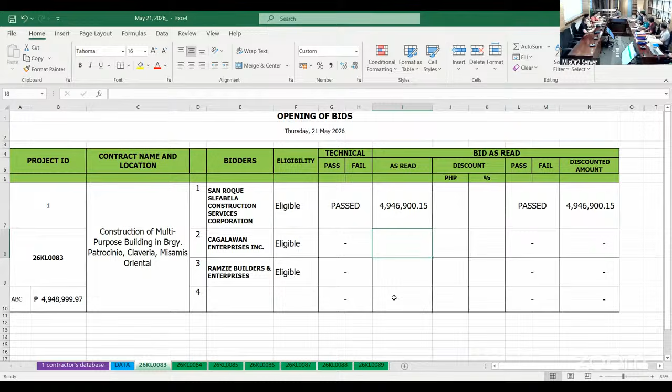Proposal for San Roque Slfabela Construction Services Corporation, composed of 33 pages. Bill of quantities present. Detailed estimates present. Cash flow by quarter and payment schedule present. Bid form. Signed. Bid amount: 4,946,900 pesos and 15 centavos only. I repeat, 4,946,900 pesos and 15 centavos only. I'm sorry, with a discount of 10,000 pesos from the amount.

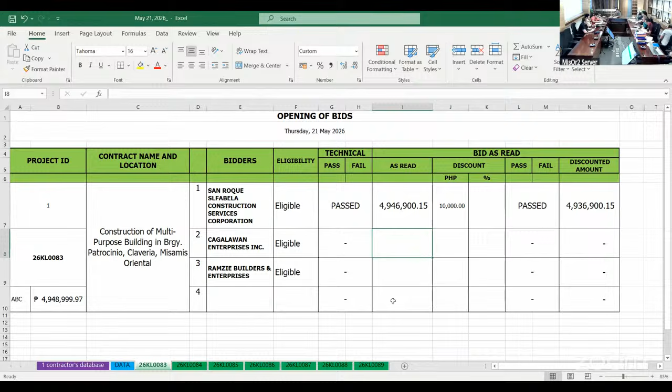Technical component of Cagalawan Enterprises Incorporated. Bid securing declaration signed and authorized. Contractor's organizational chart signed. List of contractor's key personnel to be assigned to the contract signed. List of equipment to be assigned to the contract signed. Construction safety and health program. Attached and signed. Omnibus sworn statement. Signed and authorized. Tax clearance attached.

Present the documents for Cagalawan Enterprises Incorporated, composed of 20 pages. Bill of quantities present. Detailed estimates present. Cash flow by quarter and payment schedule present. Bid form signed. Bid amount: 4,945,885 pesos and 65 centavos only.

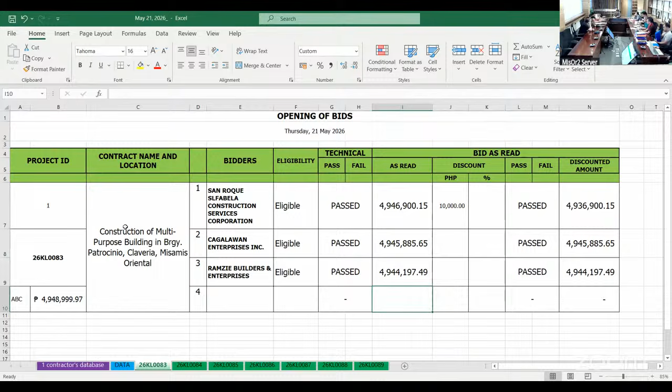Proceed to our second project to be bid today. 26KL0084. Construction of multi-purpose building, Barangay Cogon, El Salvador City, Misamis Oriental, with coordinates of 124.499 degrees, 8.542414 degrees, with an ABC of 4,949,185.87 pesos only. In this particular project, we have 4 bidders: JDE Construction, M&L Construction and Enterprises, NDP Construction Services, and Ramzie Builders and Enterprises.

In this, the result of our eligibility checking on our CWA, it was found out that these 4 bidders are eligible for this project. We may proceed for the opening of the financial and technical response.

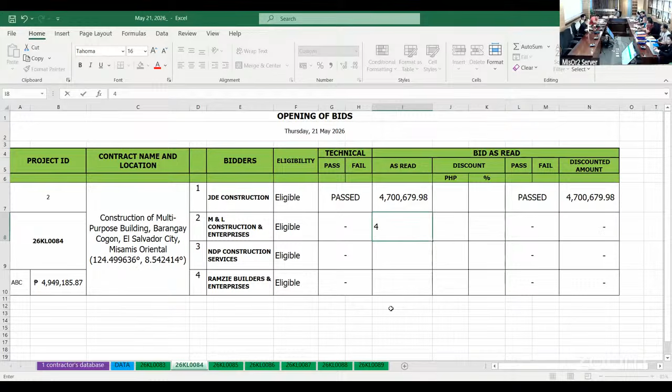Financial documents for M&L Construction and Enterprises, composed of 18 pages. Bill of quantities present. Detailed estimates present. Cash flow by quarter and payment schedule present. Bid form, signed. Bid amount: 4,945,402 pesos and 62 centavos only, with discount offered of 7% from bid amount.

Technical component of NDP Construction Services. Bid securing declaration, signed and authorized. Contractor's organizational chart, attached and signed. Contractor's list of key personnel for the contract, signed. List of contractor's equipment pledged to the contract, attached and signed. Construction safety and health program, signed. Omnibus sworn statement, signed and authorized. Tax clearance attached.

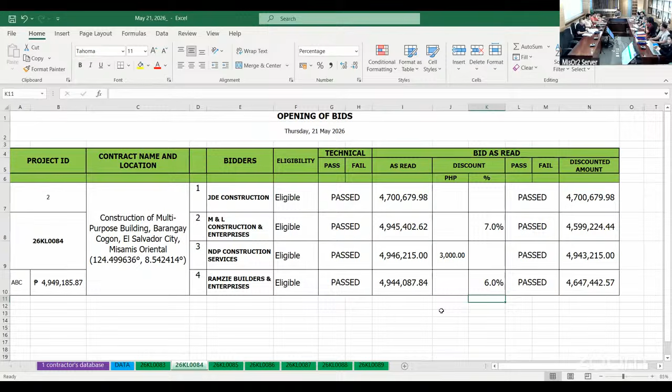Financial documents for Ramzie Builders and Enterprises, composed of 22 pages. Bill of quantities, present. Detailed estimates, present. Cash flow by quarter and payment schedule, present. Bid form, signed. Bid amount: 4,944,087 pesos and 84 centavos with a discount offered of 6% from bid amount. I repeat, bid amount is 4,944,087 pesos and 84 centavos with a discount of 6% from bid amount.

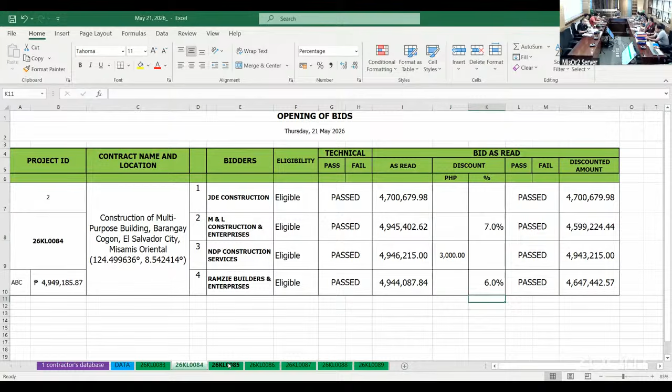We will proceed to our third project, 26 KL 0085, construction of multipurpose building, covered court, within Malibato Integrated School, School ID 127804, Barangay Malubog, Manticao, Misamis Oriental, with an ABC of 4,949,221 pesos and 34 centavos. In this particular project, we have three bidders: Hera 1 Strength Construction, Jamray Builders and Enterprises, and Abaycer Construction Supplies and General Merchandise.

Based on our generated CWA result, it was found out that these three bidders are eligible for this project. We may proceed to the opening of the technical and financial components.

Technical component of Hera 1 Strength Construction. Bid securing declaration, signed and authorized. Contractor's organizational chart, signed. List of contractor's key personnel to be assigned to the contract, signed. List of equipment pledged to the contract, signed. Contractor's construction safety and health program, attached and signed. Omnibus sworn statement, signed and authorized. Tax clearance attached.

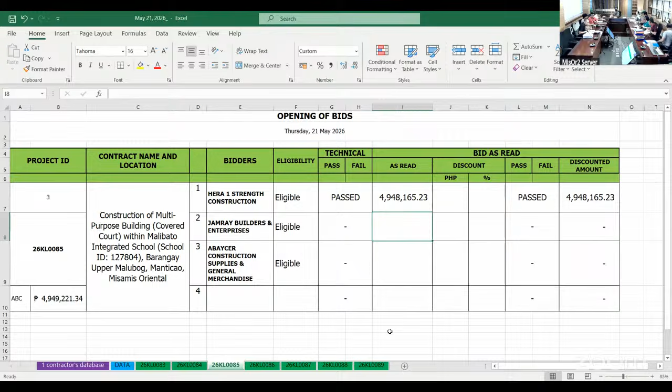Financial documents for Jamray Builders and Enterprises, composed of 19 pages. Bill of quantities, present. Detailed estimates, present. Cash flow by quarter and payment schedule, present. Bid form signed. Bid amount: 4,943,652 pesos and 96 centavos.

Technical component of Abaycer Construction Supplies and General Merchandise. Bid securing declaration signed and authorized. Contractor's organizational chart signed. List of contractor's key personnel signed. List of equipment pledged to the contract, attached and signed. Omnibus sworn statement, signed and authorized. Tax clearance attached.

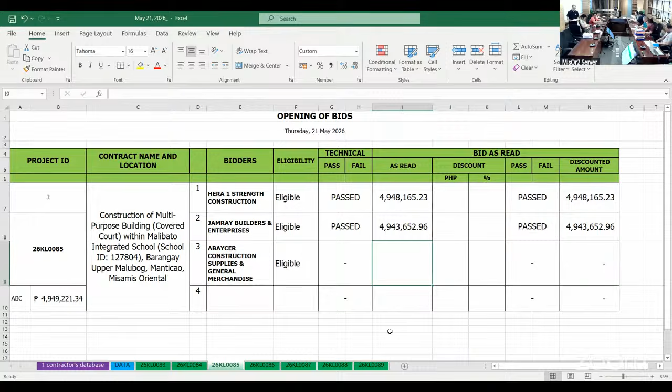Proposal for Abaycer Construction Supplies and general merchandise. The proposal consists of 11 pages. Bill of quantities, present. Detailed estimates, present. Cash flow by quarter and payment schedule, present. Bid form signed. Bid amount: 4,940,953 pesos and 54 centavos.

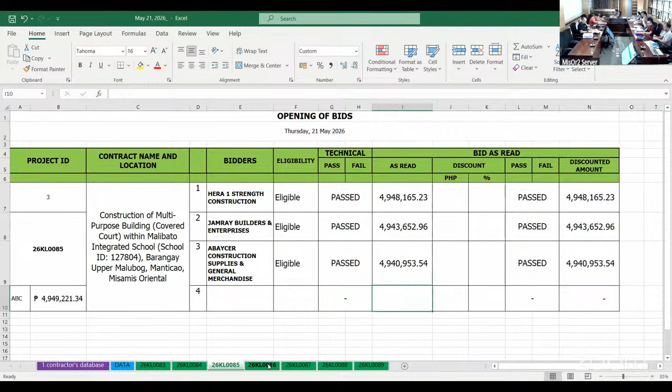So our fourth project: 26 KL 0086, construction of multi-purpose building, Barangay Calacapan, Initao, Misamis Oriental, with a coordinate of 124.364456 degrees and 8.491258 degrees, with an ABC of 4,949,328 pesos and 10 centavos. For this particular project, we have four bidders: NJS Construction and Services, RS Construction, Hera 1 Strength Construction, and Ramdaan Construction.

Based on our generated CWA result, it was found out that Ramdaan Construction has no work experience for this project, so Ramdaan is ineligible. And NJS Construction and Services did not update their NFCC in our civil works application. We will check in their technical component if they attached their NFCC. RS Construction and Hera 1 Strength Construction are both eligible for this project. We may proceed to the opening of the technical and financial proposals for NJS Construction, RS Construction, and Hera 1 Strength Construction.

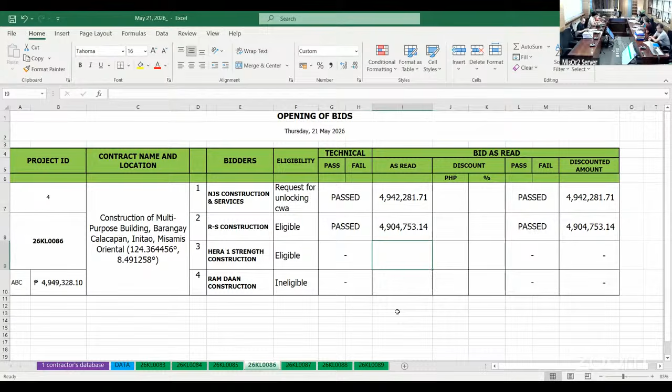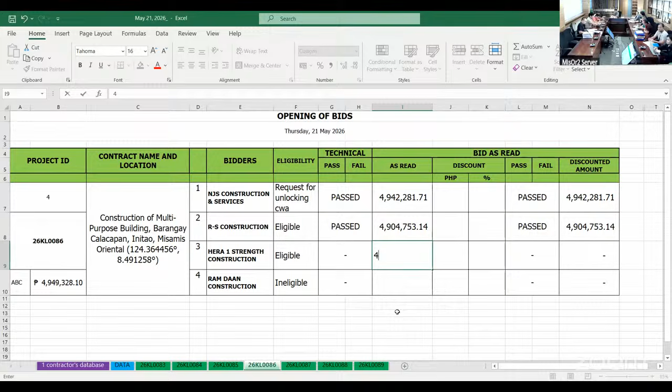Financial proposal for Hera 1 Strength Construction, composed of 65 pages. Bill of quantities, present. Detailed estimates, present. Cash flow by quarter and payment schedule, present. Bid form, signed. Bid amount: 4,944,287 pesos and 61 centavos, with a discount offered of 9% from the bid amount.

We proceed to our next project to be bid today, 26 KL 0087, construction of multi-purpose building, covered court at Madaguing Elementary School, School ID 127650, Barangay Madaguing, Claveria, Misamis Oriental, with an ABC of 4,949,398 pesos and 15 centavos only. For this particular project, we have three bidders: NJS Construction and Services, Naharo Builders Incorporated, and L&L Construction.

Based on our generated results from DPWH, it was found out that Naharo Builders Incorporated did not update their PCAB registration, NFCC, mayor's permit, tax clearance, and business registration on our CWA. Also NJS Construction and Services did not update their NFCC in our CWA. And L&L Construction is eligible for this project. For NJS Construction and Naharo Builders, we will check their eligibility documents for their updated documents. And we may proceed to the opening and reading of the technical and financial proposals.

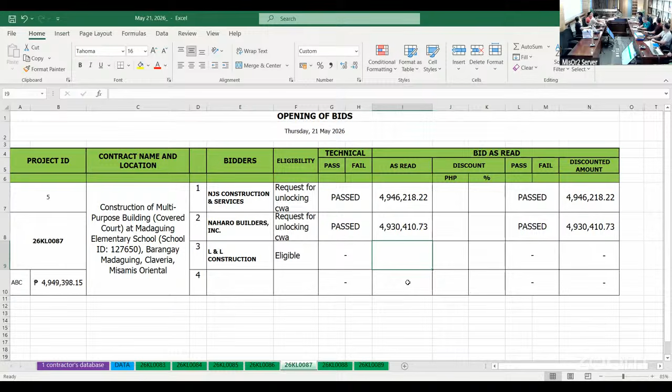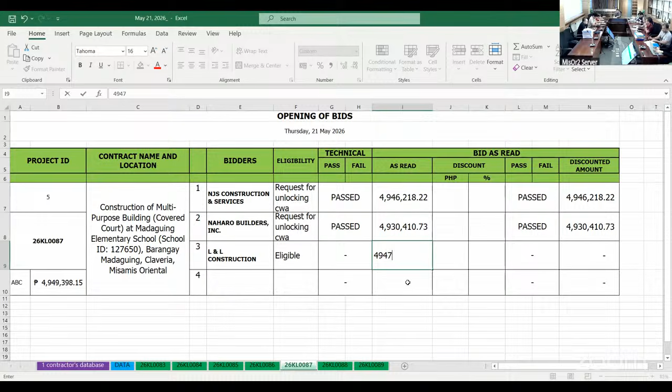Tax clearance attached. Financial component for L&L Construction composes of 13 pages. Bill of quantities, present. Detailed estimates, present. Cash flow by quarter and payment schedule, present. Bid form signed. Bid amount: 4,947,863 pesos and 16 centavos only.

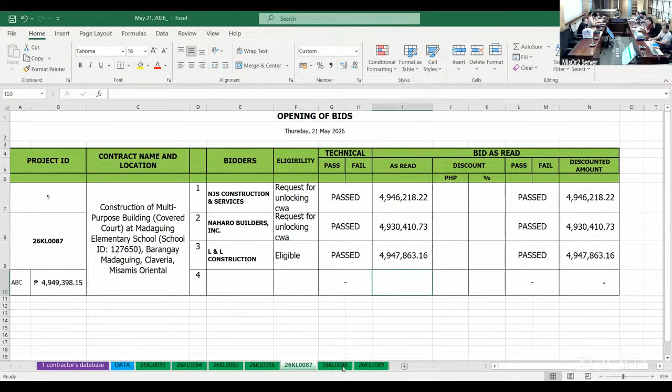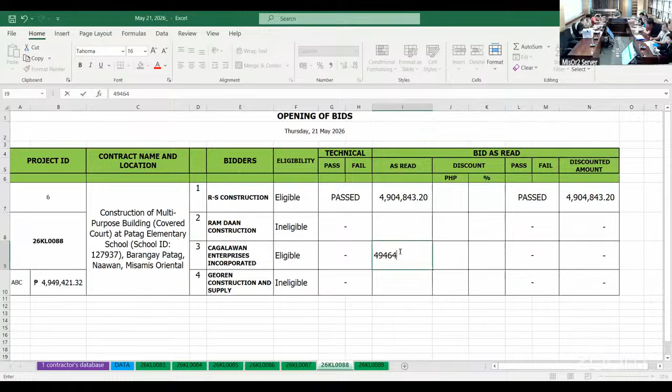Safety and health program attached. Financial component of Cagalawan Enterprises Incorporated composed of 15 pages. Bill of quantities, present. Detailed estimates, present. Cash flow by quarter and payment schedule, present. Bid form, signed. Bid amount: 4,946,421 pesos and 32 centavos, with a discount offered of 8% from the bid amount.

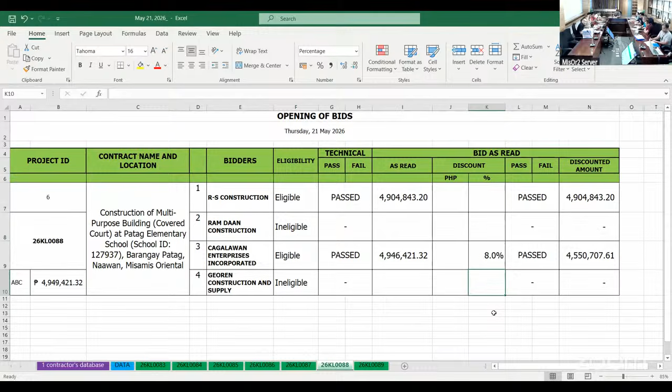We proceed to our last project: 26KL0089, construction of multi-purpose building, Barangay Mauswagon, Laguindingan, Misamis Oriental, with coordinates of 124.428123 degrees, 8.608443 degrees, and an ABC of 4,949,491 pesos and 35 centavos. For this project, we have 3 bidders: Hera 1 Strength Construction, Light Construction, and L & L Construction.

Based on our generated CWA result, it was found that these 3 bidders are eligible for this project. We may proceed for the opening of their technical and financial proposals.

Technical component of Hera 1 Strength Construction. Bid securing declaration, signed and authorized. Contractor's organizational chart, signed. List of contractor's key personnel to be assigned to the contract, signed. List of equipment assigned to the contract, attached and signed. Contractor's construction safety and health program, signed. Omnibus sworn statement, signed and authorized.

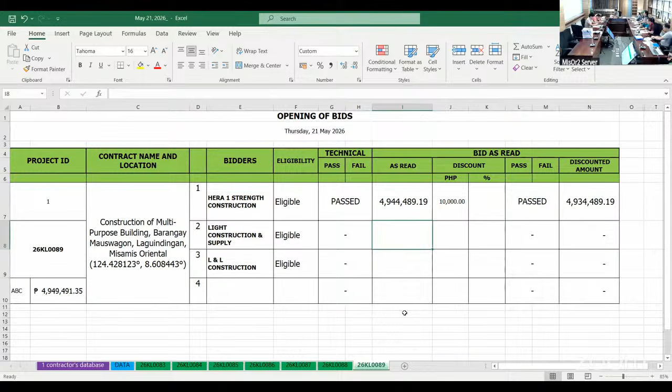Technical component of light construction and supply: Bid securing declaration, signed and authorized. Contractors organizational chart, signed. List of contractors key personnel to be assigned to the contract, signed. List of equipment to be assigned to the contract, signed. Construction safety and health program, attached and signed. Omnibus sworn statement, signed and authorized. Tax clearance attached.

Financial documents for light construction and supply. Composed of 18 pages: Bill of quantities, present. Detailed estimates, present. Cash flow by quarter and payment schedule, present. Bid form signed. Amount: 4,944,443 pesos and 39 centavos. I repeat, 4,944,443 pesos and 39 centavos.

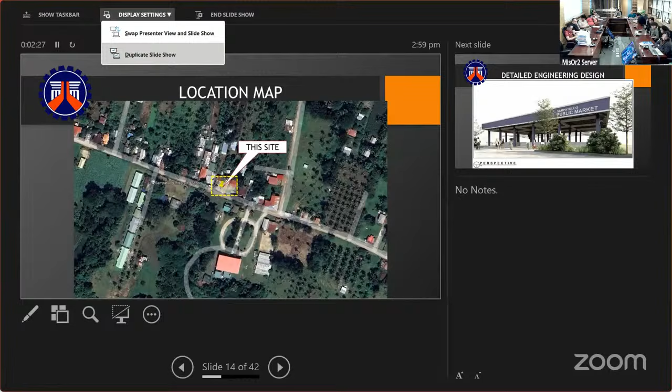Next, we have 26KL0093, construction of multi-purpose building, Sampatulog, Alubijid, Misamis Oriental. Project appropriation of 5 million pesos, ABC of 4,945,905.37 centavos, project duration of 143 calendar days. Project description: construction of one-story multi-purpose building, including excavation, soil poisoning, structural concrete, cement plaster finish, tiles, railings, plumbing, and electrical works. This is the location map.

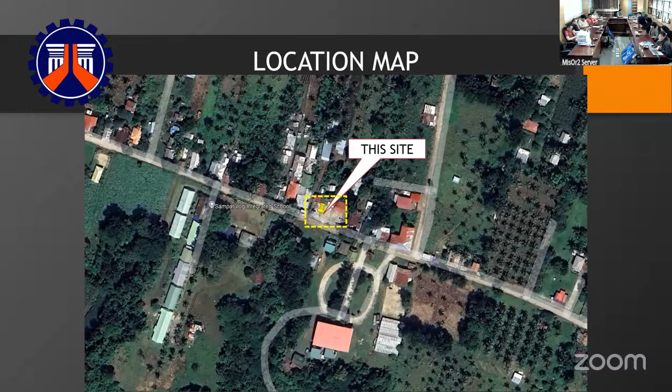For the detailed engineering design, we have our perspective.

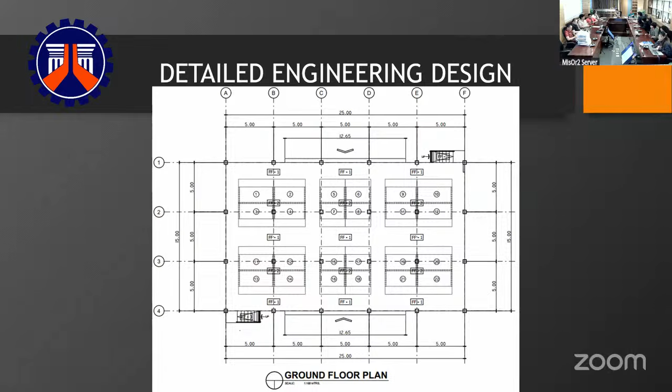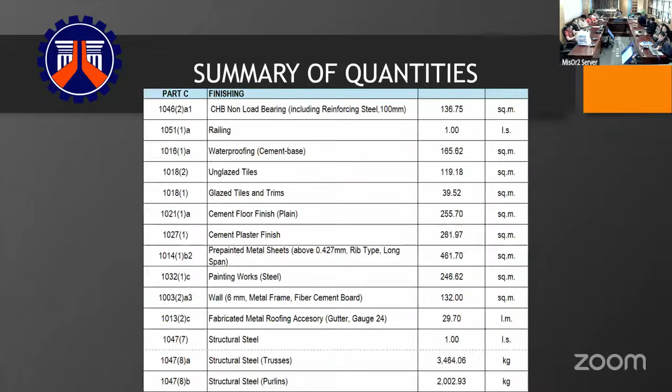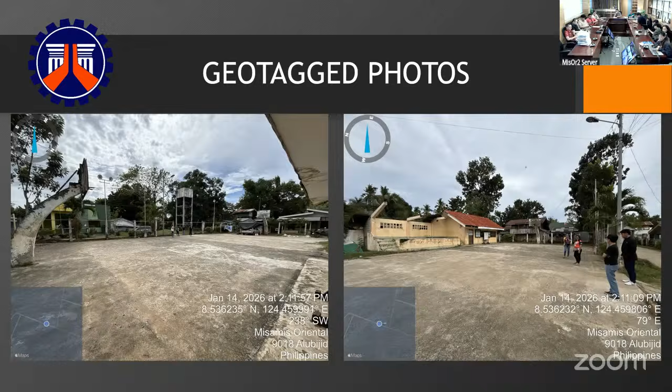Next, we have 26KL0094, construction of multi-purpose building, Barangay Santa Ana, Tagoloan, Misamis Oriental. Project appropriation of 5 million pesos, ABC of 4,948,383.45 pesos. Project duration of 143 calendar days. Project description: construction of two-story multi-purpose building includes excavation, soil poisoning, structural concrete, cement plaster finish, tiles, paints, railings, ceiling, plumbing, electrical, and mechanical works. This is the location map.

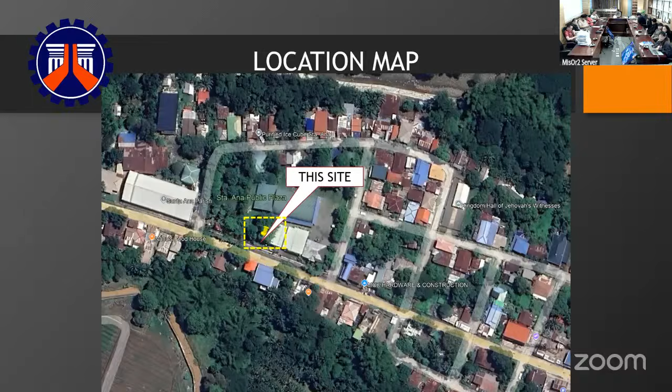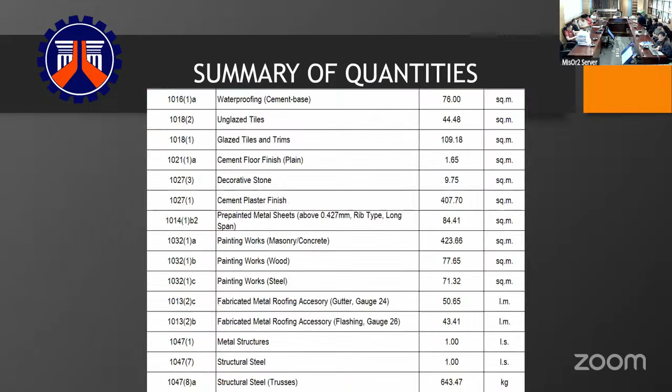For the detailed engineering design, we have our perspective, floor plan, ground and second floor plan, and our elevations. For the summary of quantities, Part 1, other general requirements. Part 2, civil, mechanical, electrical, and sanitary plumbing works. Part A, earthworks. Part B, plain and reinforced concrete works. Part C, finishing. Part D, plumbing and sanitary works. Part E, electrical works, and Part F, mechanical works. These are the geotagged photos.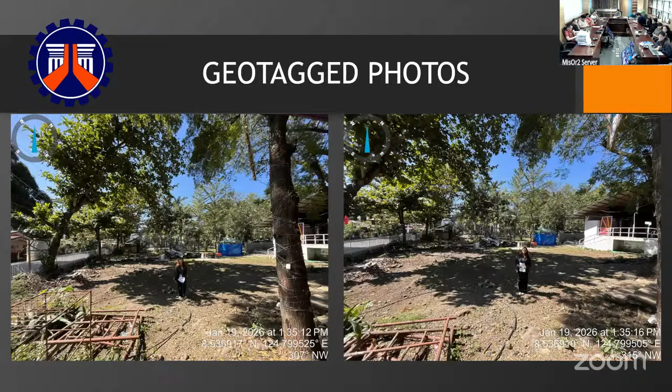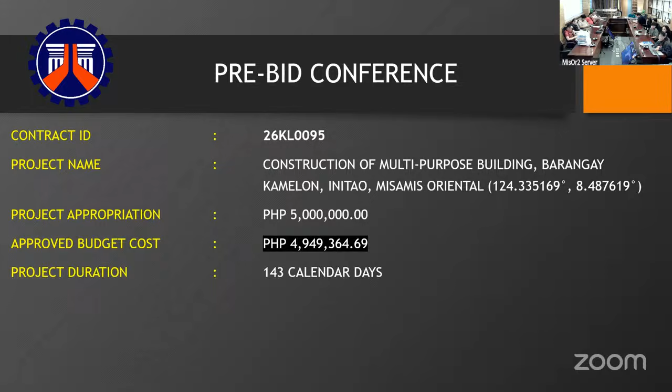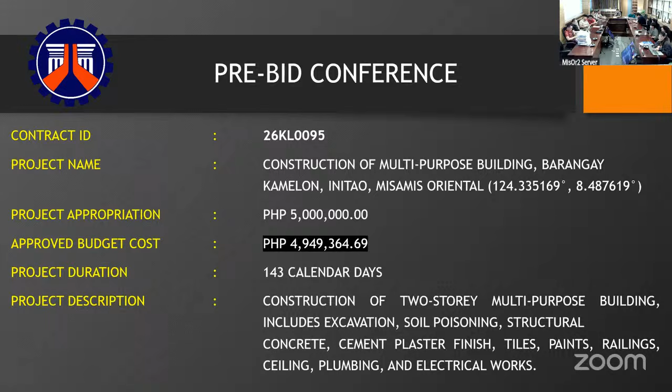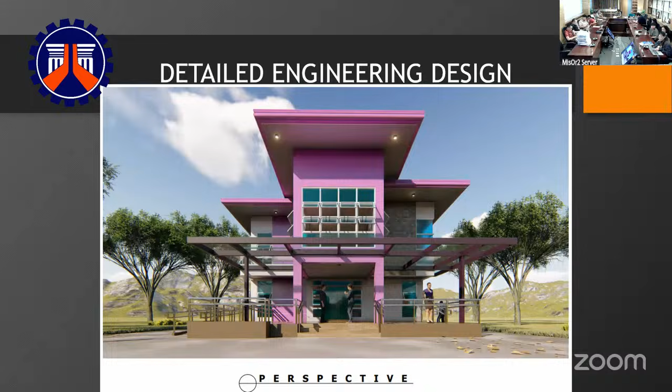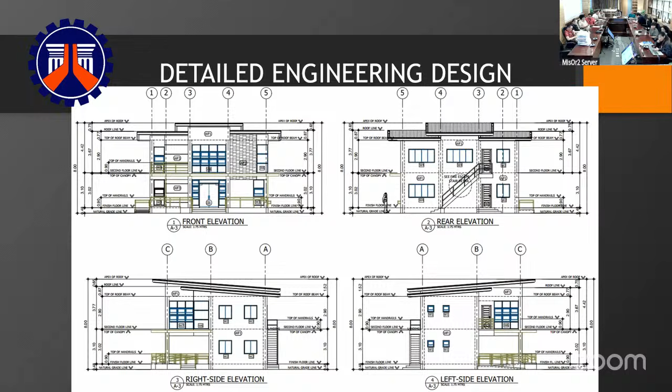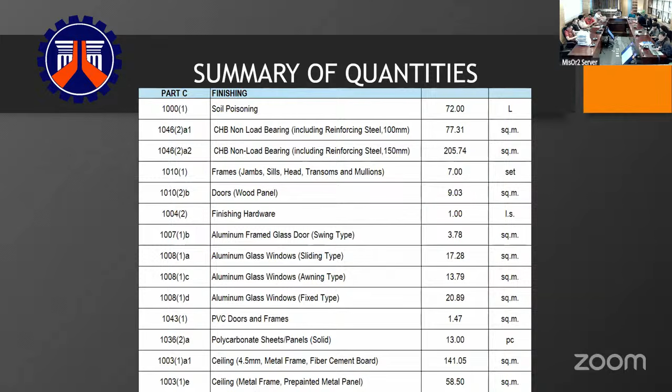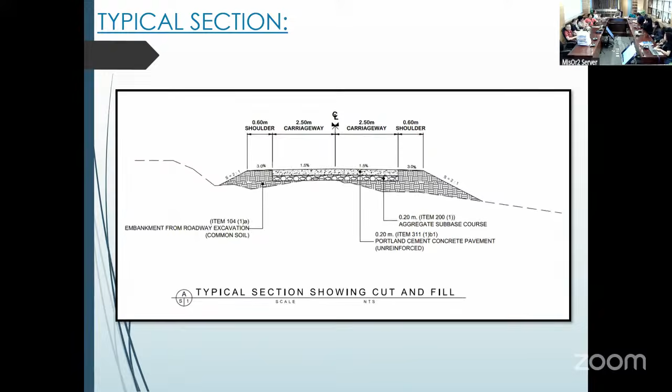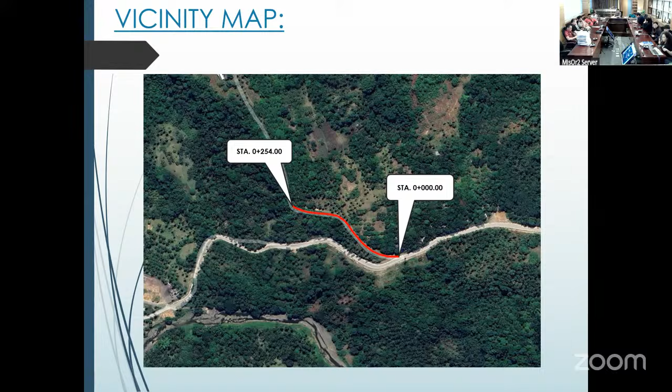Proceed, please. For the next project, we have construction of road at Barangay Lanise, Station 0 to Station 265, located at Claveria, Misamis Oriental, with a contract ID of 26KL0091, an appropriation of 4,819,000, an ABC of 4,719,688 pesos and 97 cents. Its programmed length is 265 meters. Contract duration is 45 calendar days, and its scope of work is construction of concrete roads.

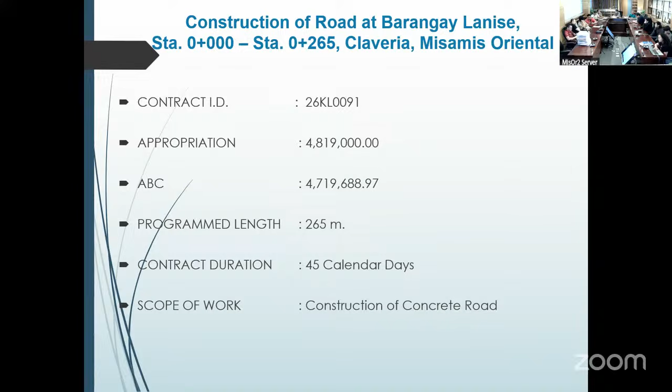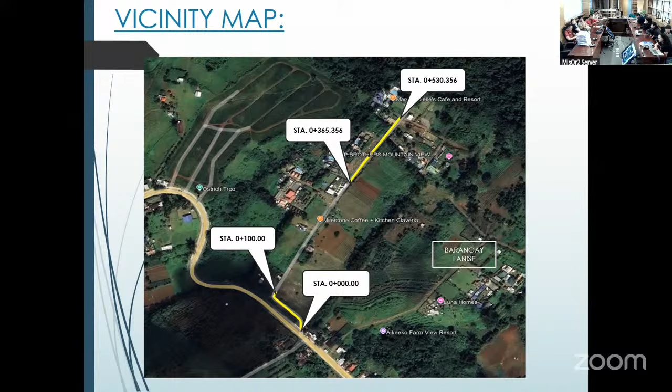For the detailed breakdown of component costs for each item, we have other general requirements, earthworks, sub-base and base course, surface course, and miscellaneous structures. For earthworks, we have item 1022, surplus common excavation, 1,282.68 cubic meters. Item 1041A, embankment from roadway structure excavation using common soil, 256.30 cubic meters. Item 1051A, subgrade preparation, common material,

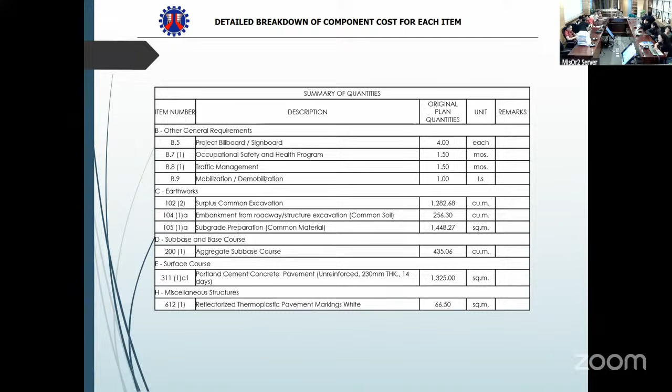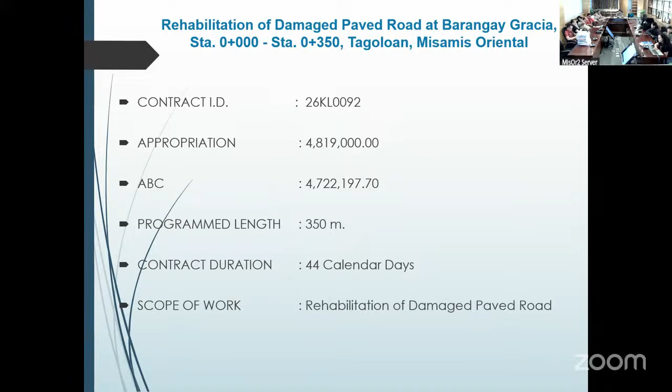For the next project, we have rehabilitation of damaged paved road at Barangay Gracia, Station 0 to Station 350, located at Tagoloan, Misamis Oriental, with a contract ID of 26KL0092, an appropriation of 4,819,000, an ABC of 4,722,197 pesos and 70 cents. Its programmed length is 350 meters. Its contract duration is 44 calendar days, and its scope of work is rehabilitation of damaged paved road.

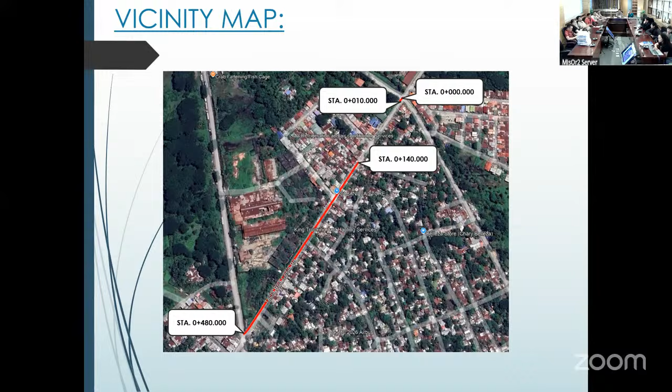For the detailed breakdown of component costs for each item, we have other general requirements, earthworks, sub-base and base course, and surface course. For earthworks, we have item 1013B3, removal of actual structures, obstruction, 0.23 meters thick, PCCP unreinforced, with a quantity of 1,750 square meters. Item 1051A, subgrade preparation, common material,

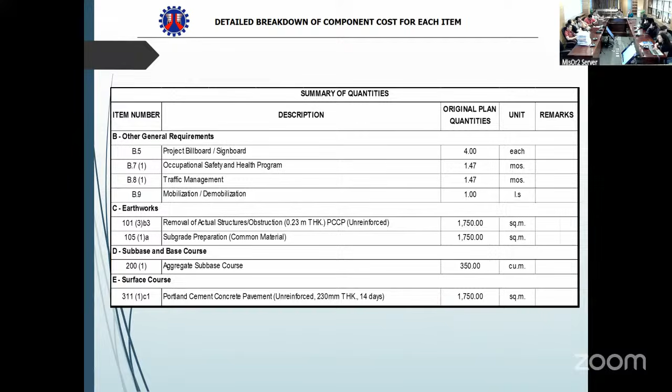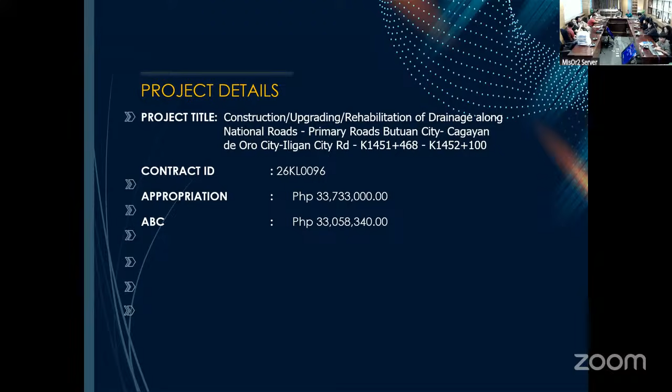So for the next project, we have construction, upgrading, rehabilitation of drainage along national roads, primary roads, Butuan City, Cagayan de Oro City, Iligan City Road, kilometer 1451 plus 468 to kilometer 1452 plus 100. So for the contract ID, this is 26KL0096. For the appropriation, we have 33,733,000. And for the ABC, we have 33,058,340 pesos only. So for the program length, we have 904 meters. The contract duration is 199 calendar days. And the scope of work is construction, upgrading, or rehabilitation of drainage.

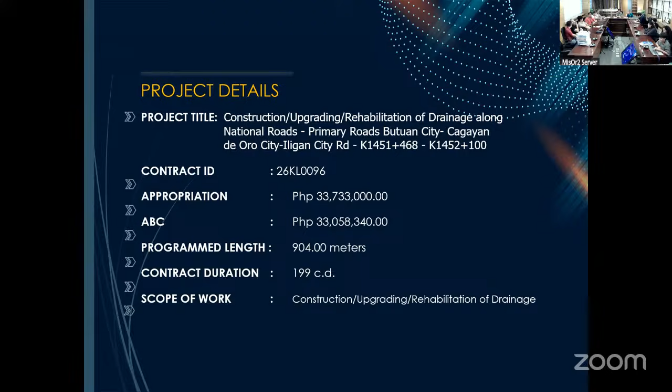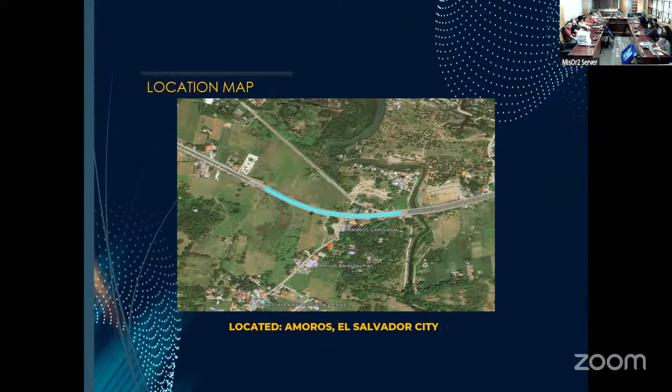This shows the location map of the said project. It is located in Amoros, El Salvador City. This shows the site development plan of the said project. It is near the Amoros Bridge and the bypass road of El Salvador.

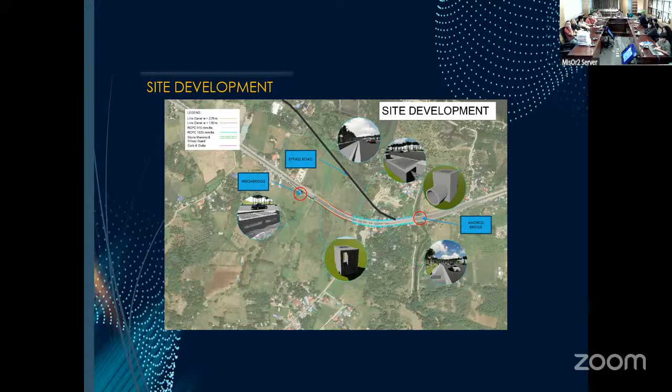So for the summary of quantities, we have Part A, facilities for the engineer. Item number A118, provision of field office for the engineers on rental basis. So for the quantity, 6.63 months. And for Part B, we have the other general requirements. This includes the project billboards, occupational safety and health program, traffic management, and mobilization and demobilization.

So for Part C, we have earthworks, item number 1013B3, removal of actual structures or obstruction, 0.23 meter thick PCCP unreinforced, with a quantity of 22.28 square meters. Next, item number 1051A, subgrade preparation for common material with a quantity of 22.28 square meters. So for Part D, sub-base and base course, item number 2001, aggregate sub-base course with a quantity of 4.46 cubic meters. So for the surface course, item number 3111C1, Portland cement concrete pavement unreinforced 0.23 meter thick with a quantity of 22.28 square meters.

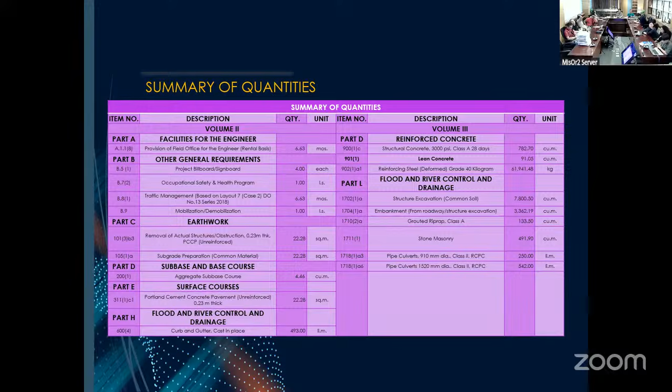So for the flood and river control and drainage, we have the curb and gutter cast in place, the quantity of 493 lineal meters. And item number 9001C, structural concrete 3000 PSI class A 28 days, the quantity of 782.70 cubic meters. For item number 9011, lean concrete, quantity 91.05 cubic meters. For item number 9021A1, reinforcing steel deformed grade 40, quantity 61,941.48 kilograms.

For the structure excavation, with a quantity of 7,800.5 cubic meters. For item number 17041A, embankment from roadway structure excavation with a quantity of 3,362.19 cubic meters. For item number 17102A, grouted riprap class A with a quantity of 133.5 cubic meters. For item number 17111, stone masonry with a quantity of

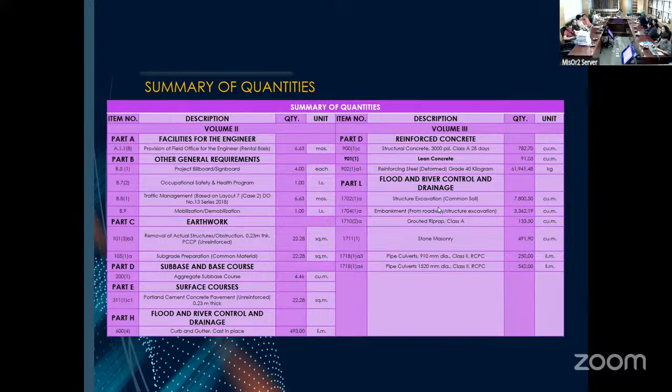So here is the typical section of reinforced concrete pipe culvert or RCPC. 2.78 meter by 3.24 meter line canal with wheel guard and stone masonry.

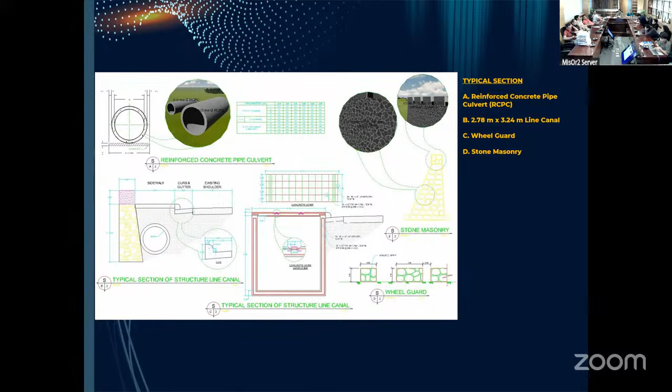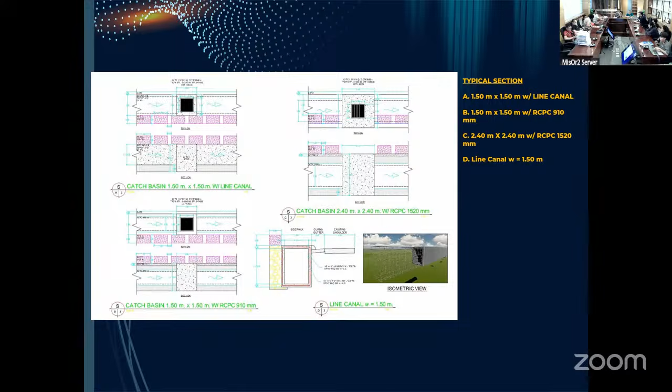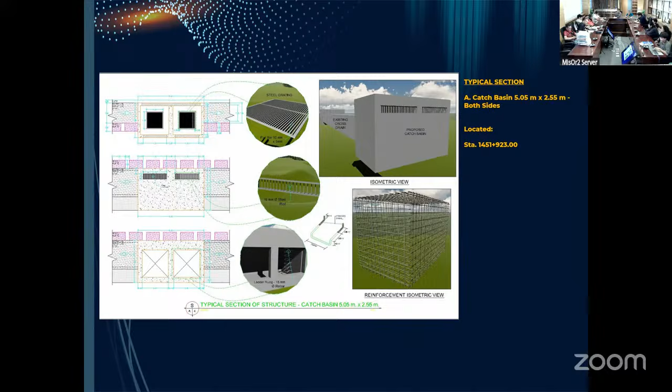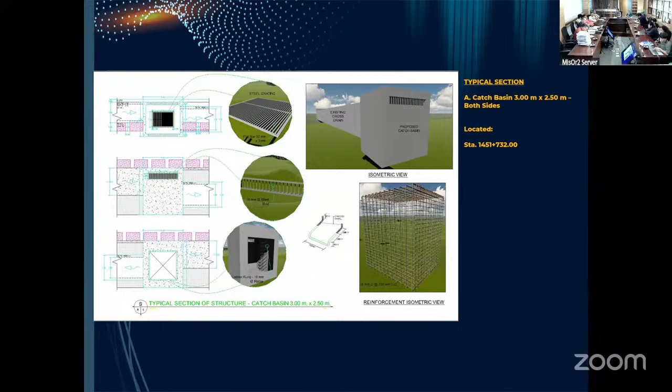So here we can see the typical section of the catch basin, 5.05 meter by 2.55 meter on both sides. This is located in station 1451 plus 923. Next, we have the typical section of the catch basin, 3 meter by 2.5 meter on both sides, located in station 1451 plus 732.

So next, for the next project, we have preventive maintenance on primary roads, Butuan City, Cagayan de Oro City, Iligan City Road, kilometer 1470 plus 826 to kilometer 1472 plus 710 and kilometer 1474 plus 605 to kilometer 1475 plus 300 located in Gitagum, Misamis Oriental. With a contract ID of 26KL0097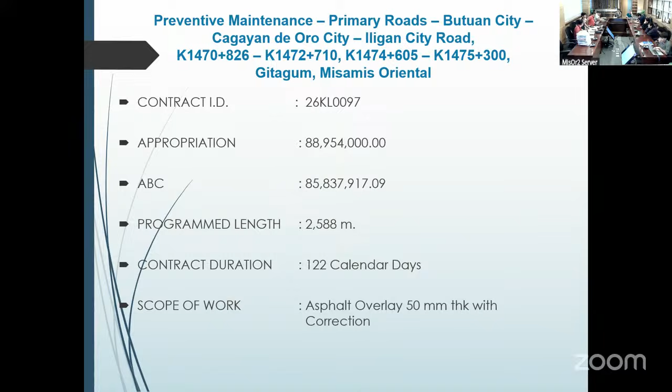and an appropriation of 88,954,000. For the approved budget cost, we have 85,837,917 pesos and 9 centavo only. For the program length, we have 2,588 meters. For the contract duration, 122 calendar days. So the scope of work is asphalt overlay 50 millimeter thick with correction.

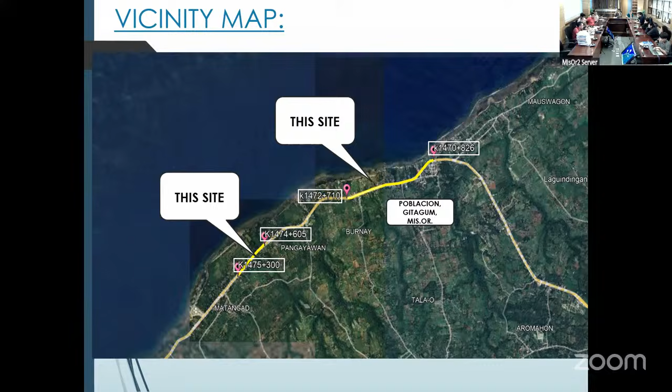So for the summary of quantities, we have item number A118, provision of field office for the engineers rental basis with a quantity of 4.07 months, and operation and maintenance of field office for the engineers 4.07 months. So for the other general requirements, we have item number B.5, project billboard and signboard with 4 each. Item number B.71, occupational safety and health program with a quantity of 4.07 months. Item number B.81, traffic management with a quantity of 4.07 months. Item number B.9, mobilization or demobilization with a quantity of 1 lump sum.

For the earthworks, we have item number 1013B3, removal of actual structures or obstruction, 0.23 meter thick PCCP unreinforced with a quantity of 301.5 square meters. For the item number 1051A, subgrade preparation of common material with a quantity of 301.5 square meters. For the sub-base and base course, we have item number 2001, aggregate sub-base course with a quantity of 60.30 cubic meter. For the surface course, we have item number 3022, emulsified asphalt with a quantity of 52,266.7 square meter.

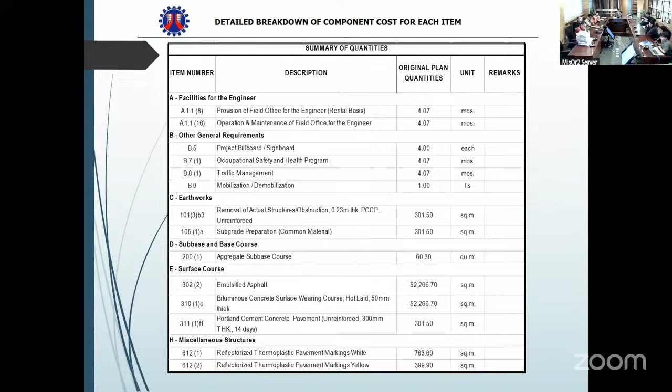For the item number 310-1C, bituminous concrete surface wearing course hot laid 50 millimeter thick with a quantity of 52,266.7 square meter. For item number 3111F1, Portland cement concrete pavement unreinforced 300 millimeter thick 14 days with a quantity of 301.5 square meters. For the miscellaneous structure, we have item number 6121, reflectorized thermoplastic pavement markings, white, with a quantity of 763.6 square meters, and item number 6122, reflectorized thermoplastic pavement markings, yellow, with a quantity of 399.9 square meters. So now, here is the typical section for the said project.

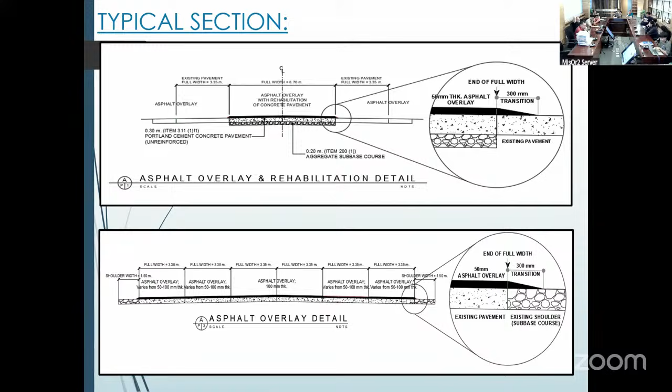We will request the BAC secretariat to discuss the bidder's checklist of financial and technical component and reminders. Thank you, sir. Again, before discussing the bidder's checklist, we would like to inform our bidders that the discussed projects could be subjected to supplemental bulletin, and it will be posted to our website and PhilGEPS, and also to our live viewers.

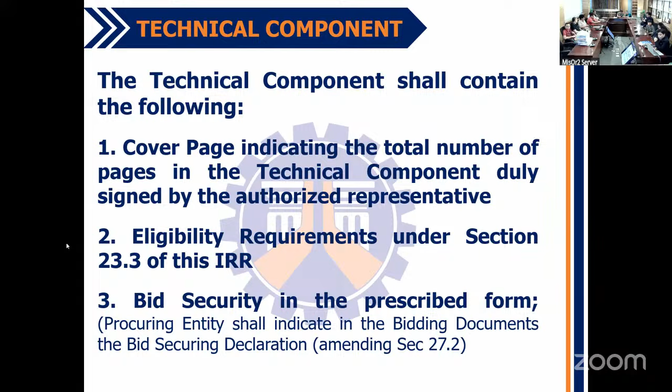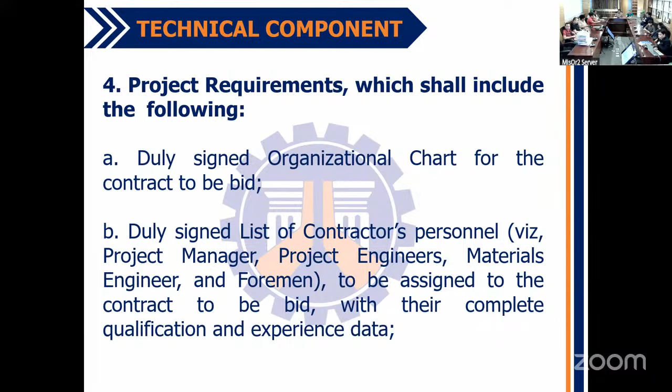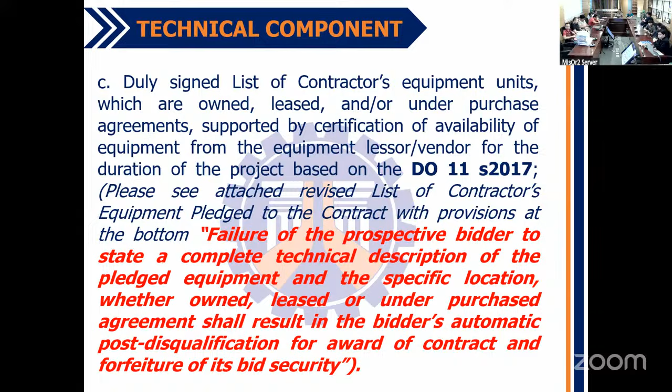Number four, project requirements which shall include the following. A, duly signed organizational chart for the contract to be bid. B, duly signed list of contractors' personnel. C, duly signed list of contractors' equipment units, which are owned, leased, and or under purchase agreements, supported by certification of availability of equipment from the equipment lessor or vendor for the duration of the project based on DO 11 series of 2017. And D, construction safety and health program.

Number five, omnibus sworn statement by the prospective bidder or its duly authorized representative in the form prescribed by the GPPB as to the following. A, it is not blacklisted or barred from the bidding by the government of the Philippines or any of its agencies, offices, corporations, or local government units, including foreign government or foreign or international financing institution whose blacklisting rules have been recognized by the Government Procurement Policy Board by itself or by relation, membership, association, affiliation, or controlling interest with another blacklisted person or entity as defined and provided for in the Uniform Guidelines on Blacklisting.

B. Each of the documents submitted in the satisfaction of the bidding requirements is an authentic copy of the original, complete, and all statements and information provided therein are true and correct. C. It is authorizing the head of procuring entity or HOPE or its duly authorized representatives to verify all the documents submitted. D. Complies with the disclosure provision under Section 47 of this Act and this IRR in relation to other provisions of RA 3019.

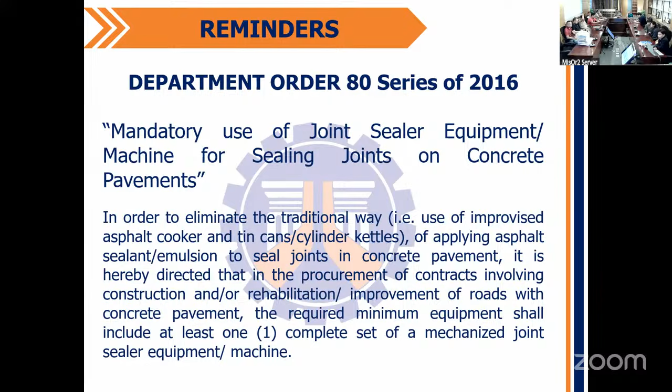Reminders, Department Order 80 Series of 2016, mandatory use of joint sealer equipment or machine for sealing joints on concrete pavements. In order to eliminate the traditional way of applying asphalt, sealant, or emulsion to seal joints in concrete pavement, it is hereby directed that in the procurement of contracts involving construction and/or rehabilitation or improvement of roads with a concrete pavement, the required minimum equipment shall include at least one complete set of mechanized joint sealer equipment or machine.

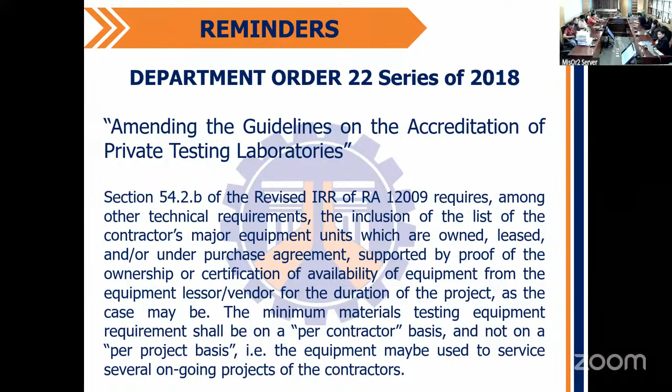And DO 22, series of 2018, amending the guidelines on the accreditation of private testing laboratories. Section 54.2.b of the revised IRR of RA 12009 requires, among other technical requirements, the inclusion of the list of the contractor's major equipment units, which are owned, leased, and/or under purchase agreement, supported by proof of ownership or certification of availability of equipment from the equipment lessor or vendor for the duration of the project, as the case may be. The minimum materials testing equipment requirement shall be on a per contractor basis and not on a per project basis.

Thank you, Roxy. Are there any comments or questions from our viewers? None, sir. Hearing none, so we're done.